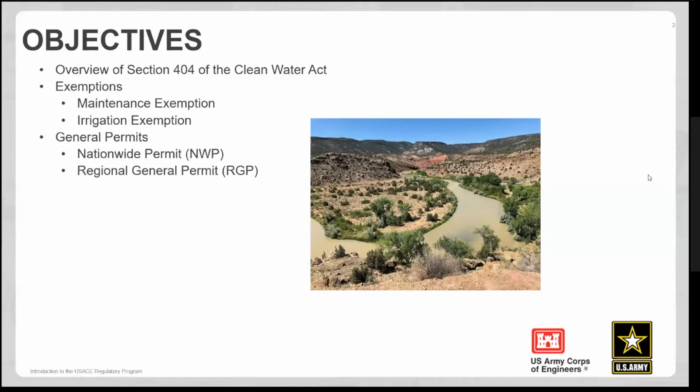So as I just stated, some of the objectives here today are to touch on some of the common exemptions we see in the agricultural field, as well as some of the general permits, nationwide permits and regional general permits that are most commonly used in Colorado. The Corps' mission, of course, is to balance development with protection of the aquatic environment. I think it's important to note that the Corps is not a proponent or opponent of any project. We're simply here to enforce the Clean Water Act and all the regulations associated with that.

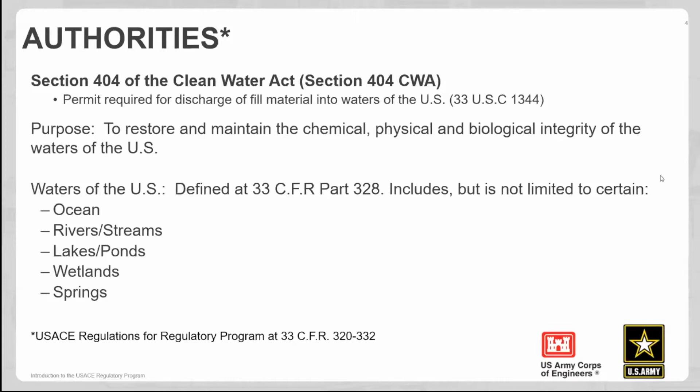So Section 404 of the Clean Water Act, this is where the Corps derives their regulatory authority over freshwater resources. Purpose is to restore and maintain the chemical, physical, and biological integrity of these waters. And waters of the U.S. as defined at 33 CFR Part 328, also known as jurisdictional waters of the U.S., include oceans, rivers and streams, lakes and ponds, some wetlands, and some springs. In rivers, streams, lakes, and ponds, our jurisdiction begins at the ordinary high water mark. Anything below the ordinary high water mark is considered jurisdictional under Section 404 of the Clean Water Act.

Beyond the ordinary high water mark, when you get into wetlands, our jurisdiction begins at the boundary between where the wetlands transition into upland. It's known as a delineation. We'll go out and delineate boundaries, or consultants can delineate those boundaries. And that gives us a starting point as to where we might start regulating a project.

Two things need to occur for a project to be regulated by the Corps. We need activity jurisdiction, which is a discharge of fill material in this case. We need geographic jurisdiction. So this would be the waters of the US. If you're discharging fill material into uplands, you may have triggered the activity jurisdiction, but we don't have geographic jurisdiction in uplands. So a permit is not required for something like that.

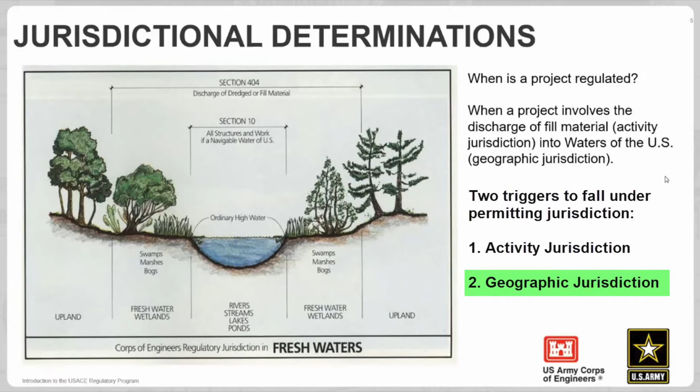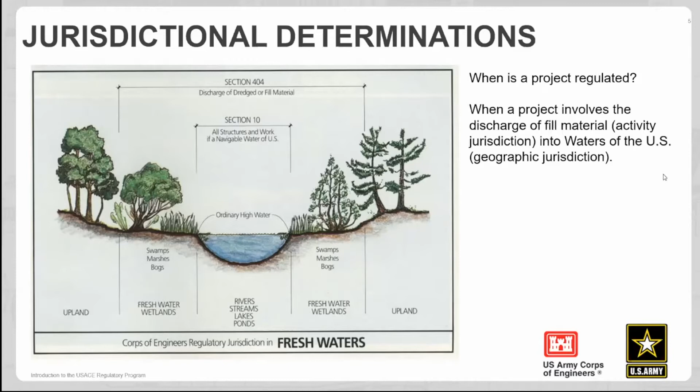On the flip side, there's a few activities that we don't regulate, such as above ground vegetation clearing, for example. So that activity is not regulated. So even if you're doing above ground vegetation clearing in a geographically jurisdictional resource, such as a wetland, you've not triggered both parts of this test. Still no permit required. A permit would be required if you are going to discharge that fill material into geographic waters of the US, such as rivers, streams, lakes, ponds, wetlands.

So delineation, an aquatic resource delineation, often referred to as a wetland delineation, just identifies the boundaries and acreage of any aquatic resource that might be in a review area. It does not make any claims towards jurisdiction yet. We can verify these things. We call them aquatic resource delineation verifications, where the Corps will confirm or concur with a delineation. We can go out and say, yes, we concur, that's where the wetland ends. This is where uplands begin.

If your project's up in the uplands, no permit required from that point on. On the flip side, if you're down in the wetlands, potentially need a permit, or we can look for an exemption, things like that. It just determines where that boundary is, where that line is between upland and wetland, or the ordinary high water mark. It determines that boundary of where jurisdiction might begin for us.

And then jurisdictional determinations. We don't get into these a whole lot on the West Slope. I know they're a little more prominent on the Front Range. They do quite a few more jurisdictional determinations. This is a legal determination that the Corps is making based on a delineation that an aquatic resource is or is not jurisdictional. It's basically a yes, no, a snapshot in time. Yes, this area contains waters of the U.S., or no, it does not. This can help with permitting options. If a resource is non-jurisdictional, no permit required for activities within that resource.

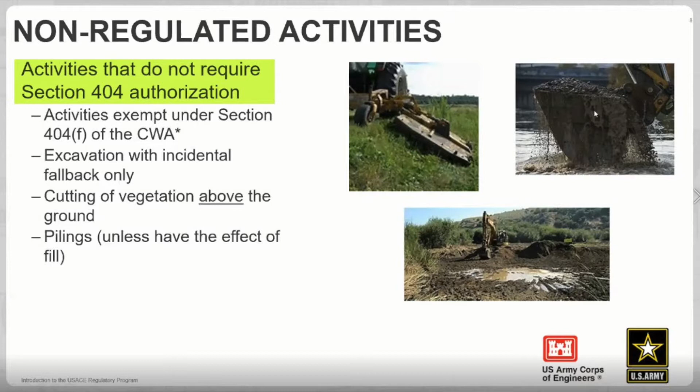Another item, piling, for example, say like a driven post, a fence post or something like that. Those aren't typically regulated unless they have the effect of fill. So if you were to stack up, say, a couple dozen posts all within close proximity, so they gathered sediment, slowed the flow of water, altered the circulation, things like that, that has the effect of fill. We may have to step in and regulate that. But say, cattle exclusion fencing, something like that, if they're just on pilings, doesn't have the effect of fill, non-regulated activity from the Corps' perspective.

So I'll touch on a few of our most common exemptions. Actually, this list is all of our exemptions right here. The normal farming exemption, maintenance exemption, construction or maintenance of farm and stock ponds, that's also known as our irrigation exemption. Construction of temporary sedimentation basins on a construction site, activities authorized by Section 208(b)(4) of the Clean Water Act, or construction or maintenance of farm roads, forest roads, or temporary mining roads, that is. Those are all the Section 404(f) exemptions that the Corps has under the Clean Water Act. Permits are not required for these actions as long as you meet the exemption.

And part of meeting that exemption is what's referred to as the recapture provision. A permit is required if it's part of an activity whose purpose is to convert an area of waters of the U.S. into a use to which it was not previously subject. This would mean where the flow or circulation of waters have been impaired or the reach is reduced. And that's a two-part test there. So if the flow and circulation is impaired and the reach is reduced, you've triggered both parts of the recapture provision, and a permit would be needed.

So it is possible to maybe alter the flow, say with a diversion structure. Theoretically, you shouldn't be reducing the reach of those waters. Therefore, the recapture provision wouldn't have been met yet. And I'll go a little bit more into that here in a couple of slides when we get into the irrigation exemption. But the recapture provision is kind of one way that you can get booted out of an exemption. Again, that's if you're altering the flow and circulation of waters of the U.S., as well as reducing the reach of those waters.

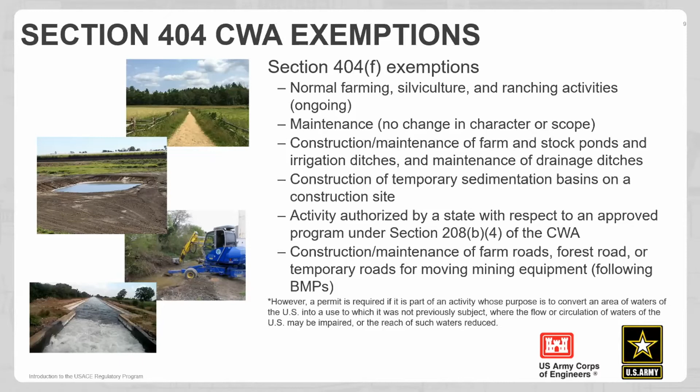For example, if you need to replace a 10-inch pipe, it needs to be replaced with a 10-inch pipe of similar character, scope, and size. You cannot go back and replace it with a bigger structure, that's outside of the original fill design. It's got to be the same exact fill design.

So some items that often qualify for maintenance exemptions are dikes, dams, levees, groins, riprap, breakwaters, causeways, bridge abutments or approaches, and transportation structures. Particularly after an emergency occurs, this maintenance exemption allows for emergency reconstruction of things like dams, causeways, levees, riprap, bridge abutments, all that, assuming you're going to put it back how it was before, apples for apples. It cannot go outside of the original fill design.

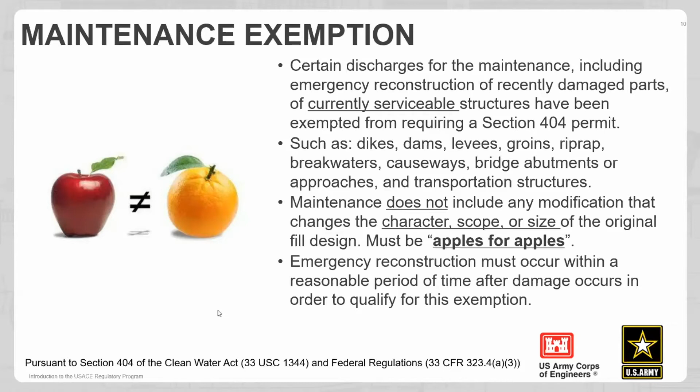So there's some gray area in the maintenance exemption, but the one area that is black and white is the apples for apples clause, or the like for like. It's got to be replaced in kind within the original fill design. Where we get a little bit outside of that can be the irrigation exemption.

This exemption is for the construction or maintenance of farm and stock ponds and irrigation ditches, or the maintenance of drainage ditches. Also included in this exemption are discharges associated with siphons, pumps, head gates, wingwalls, weirs, diversion structures, and other facilities as are appurtenant and functionally related to the irrigation ditch. Those are all included in the exemption.

Common feature, that photo on the left, a diversion structure. Water is diverted to the ditch there, kind of in the foreground, but in the background, the river is still able to flow through. It's not totally choking off the river. It's not reducing the reach. That river is still able to flow to its ultimate destination.

Our exemptions are all reviewed on a case-by-case basis, so it's always helpful to reach out, even if you're fairly certain. Because even if you are fairly certain, if you let us know and we know you're going to be in there creating a diversion structure or replacing a head gate, something like that, and we get a call from, say, a nosy neighbor, we'll know that that's going on, and it won't raise any immediate red flags. We'll kind of know, hey, he's in there working in the river, he's exempt, it's for his irrigation ditch.

As far as these ditches go, what constitutes an irrigation ditch versus, say, a municipal or industrial M&I water supply? As a general rule of thumb, greater than 50% of the water conveyed in the ditch should be used for agricultural purposes, an ultimate agricultural purpose.

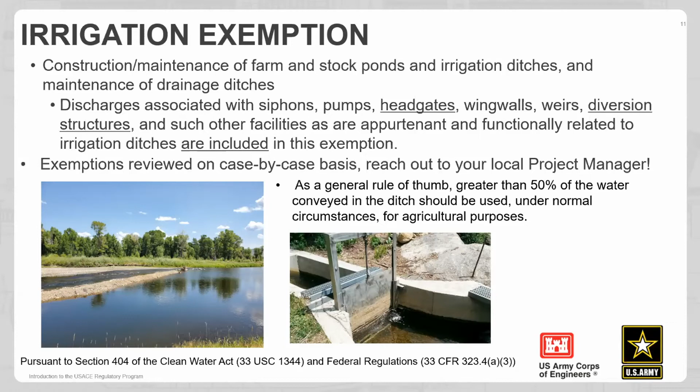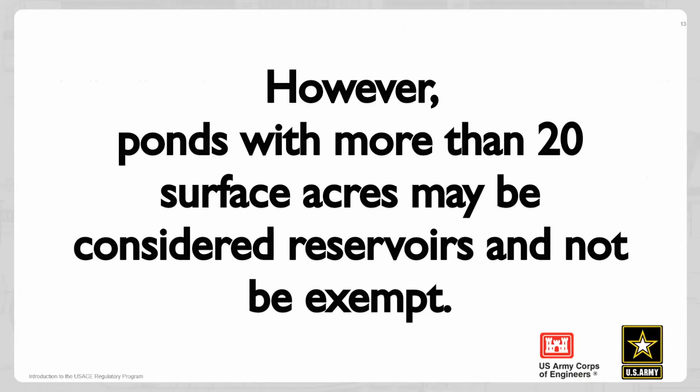This is kind of a hot topic within the past 2 years. Ditch to pipe conversions, very common in Colorado, especially salinity and selenium control projects. However, on July 24th, 2020, the Corps and the EPA issued a joint memo to the field regarding irrigation exemptions, and there's some specific language in there regarding ditch to pipe conversions. Specifically, that language determined that the conversion of a jurisdictional ditch into a pipe is changing the use of that water, and by definition also reducing the water's reach, which would trigger the recapture provision.

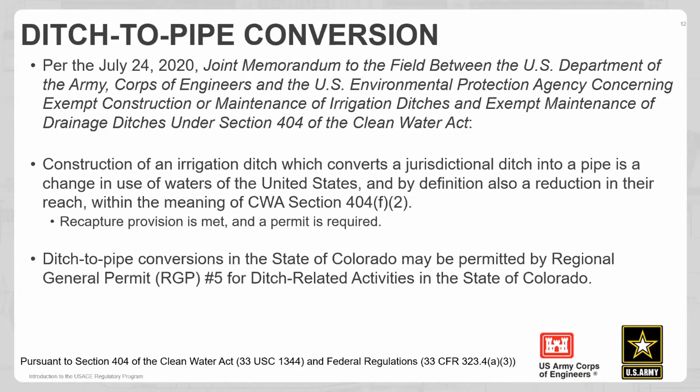And they kind of didn't leave any gray area in there for us to say otherwise. It's kind of a blanket statement that this always meets the recapture provision. A permit is always required for a ditch to pipe conversion. A jurisdictional ditch to pipe conversion. Not all ditches are jurisdictional. However, in Colorado, ditch to pipe conversions may be permitted by Regional General Permit number 5, which was recently created in response to this memo, which covers ditch-related activities in the state of Colorado.

These are the main types of Corps of Engineers regulatory permits. There's two main types: individual permits or general permits. Individual permits are a lot harder to get. They require an alternatives analysis, all sorts of stuff, cumulative impact assessments. It's just a much more intensive process for larger scale, higher impact projects.

There's two types of individual permits: standard permits or letters of permission. Letters of permission are kind of an expedited standard permit, if you will. Unfortunately, there are none available for use in the state of Colorado at the moment. However, standard permits are always an option for those larger impact projects. On the right-hand side there in the red, these are the easier to get permits, our general permits. There's three main types. We do not have any programmatic general permits in the state of Colorado, but we do have regional general permits. And we also have nationwide permits.

Nationwide permits are exactly what they sound like. They're issued at the nationwide level for use on lower impact projects that have been determined at the nationwide level. They're not going to be highly impactful. Similar deal with regional general permits. However, these are on a regional basis. Most of the time they follow state lines.

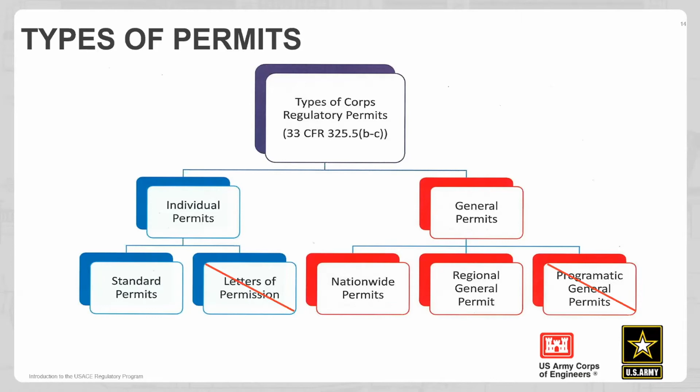However, there are some smaller regional general permits that are specific to, say, the South Platte River. There's a regional general permit for the Denver area specific to the Mile High Flood District on the South Platte River. Fort Carson's got their own regional permit. Colorado Springs has one of their own regional permits for, I believe it's for ephemeral drainages or flood control. Other regional general permits in the state of Colorado are open to the general public, such as RGP 5.

So just to touch again on nationwide permits, there's about 52 of them. There's actually a couple more now. We issued a couple new ones on this last round, so I need to update this slide. But we recently reissued them on March 15th. They get reissued about every 5 years. Sometimes they'll get modified before the 5-year mark, but the permit, once it's issued, is good until the end of that 5-year period. So March 14, 2026. If you got a permit today, it'll be valid till March 14 of 2026.

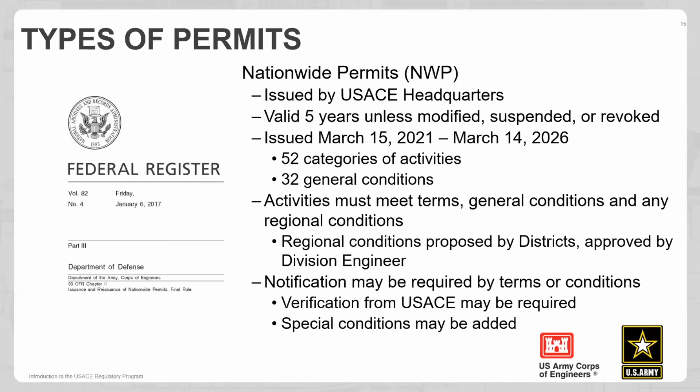And so with these nationwide permits, the activities must meet the general conditions that are associated with all of the nationwide permits, in addition to regional conditions that are proposed and set forth by individual districts. And they're usually state specific. So regional conditions pertain to Colorado, and then say New Mexico has their own regional conditions, Utah's got their own. So in addition to the general conditions, you have to abide by regional conditions, and there could be special conditions added onto a permit if you're, for example, working around endangered species or historic properties, something like that. There can be special conditions added on, or if mitigation is required.

That the permit's been authorized for use. And as long as you abide by the general conditions and regional conditions, you can use that permit without submitting a pre-construction notification to our office. Two of the big general conditions that might prevent a project from being non-notifying are the Endangered Species Act and the National Historic Preservation Act.

If you're in the vicinity of or have the potential to affect an endangered species or a potentially historic site, unfortunately, the project doesn't comply with the general conditions at that point, and you would have to submit a pre-construction notification to the Corps to ensure that those resources, whether they're an endangered species or historic property, are not going to be adversely impacted. So again, this is another good reason to coordinate with your local regulatory project manager, because they should have pretty good knowledge of whether your project site is in the vicinity of any endangered species.

And we have the ability to look into and see if there are any known historical sites in the area that might prevent your project from being non-notifying. So definitely give us a call or shoot us an email, and we can help you navigate that.

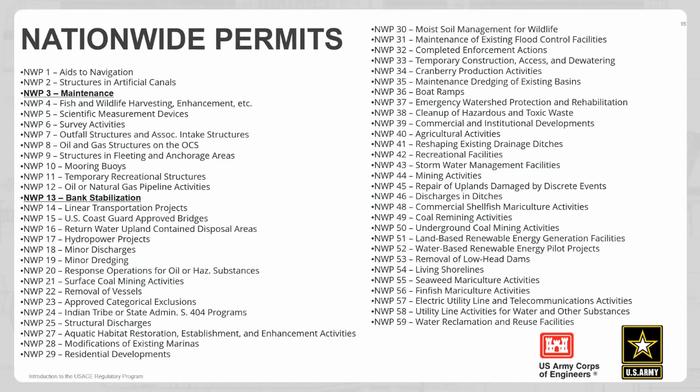So Nationwide Permit 3, this is for maintenance, and this nationwide permit covers maintenance projects that may not qualify for the exemption. You may recall that the maintenance exemption is apples for apples. Well, the maintenance Nationwide Permit 3 allows for some minor deviations, whether that's due to changes in materials or new construction techniques, or maybe another regulatory agency has a requirement, a city, a county, a state, whoever. This nationwide permit covers those projects that may not meet that exemption.

Fairly easy permit to get. Like I mentioned on the previous slide, this permit does allow for some activities to be non-notifying. There's a paragraph on all of our nationwide summaries that speaks to the notification parameters. So specifically for Nationwide Permit 3, only activities authorized by paragraph B of this nationwide permit, which is the dredging, removal of accumulated sediments, require pre-construction notification, unless you're in the vicinity of an endangered species or have the potential to affect endangered species or historic property.

So for some of those, you may recall I mentioned the pond maintenance with the irrigation exemption. You can maintain a pond under the exemption, but if you're working with a larger body of water, such as a reservoir, it's likely you'll need to come in under Nationwide Permit 3. And since it's Nationwide Permit 3B for the removal of accumulated sediments, a pre-construction notification would be required for something like that. And again, that cutoff between what we consider a pond and a reservoir is right around 15 to 20 surface acres.

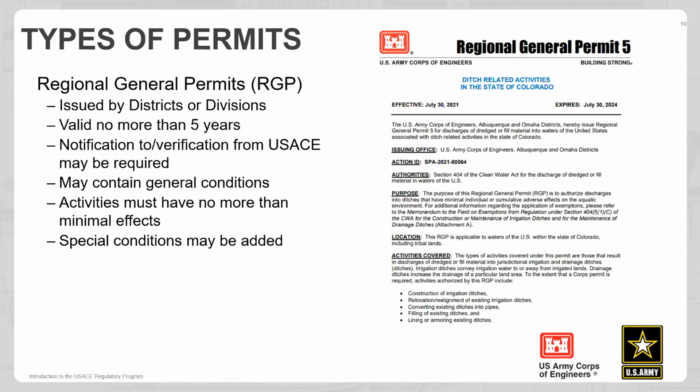Some of the other regional general permits in the state of Colorado: channel maintenance and construction on the South Platte, Fort Carson Piñon Canyon maneuver site, erosion control activities. City of Colorado Springs has their own. Two other ones that can be utilized in the state of Colorado by any of the general public are RGP 37 for stream stabilization projects and RGP 96 for natural disaster mitigation or flood related activities. Both the RGP 37 and 96 require submittal of a PCN every time.

RGP 37 is similar to Nationwide Permit 13, where it's for bank stabilization. However, this is for your larger bank stabilization projects. This allows up to 1,000 linear feet and 2 cubic yards per running foot. So it's kind of double the Nationwide Permit 13. However, you will have to submit a pre-construction notification every time under this permit.

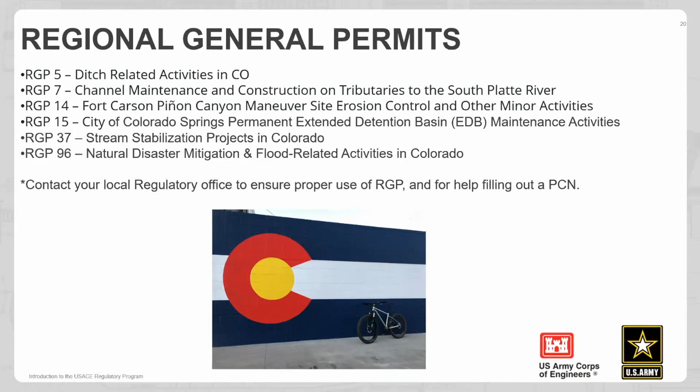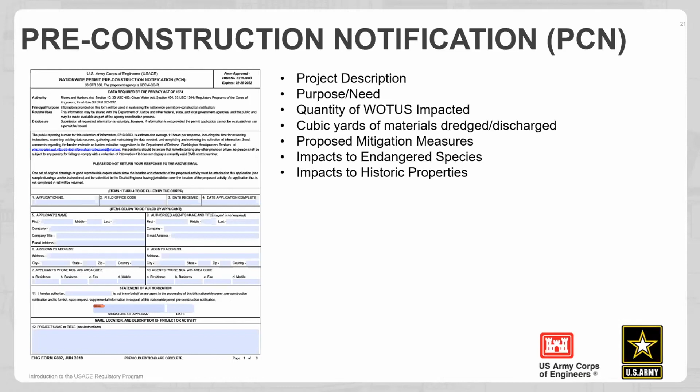This is what the PCN looks like. It's 6 pages. However, only the first 3 pages have anything really substantial on them. The key items that we're looking for are the project description, the purpose and need. Why do you need to do this project? Why does it need to be in waters of the U.S.? Why can't it be in uplands? The quantity of waters impacted, either square footage or acreage, cubic yards of materials dredged or discharged into those waters, proposed mitigation measures you considered or are implementing, and then if there are any known impacts or potential impacts to endangered species or historic properties. Again, we can help you fill this out if you need, and we're more than happy to help walk you through this.